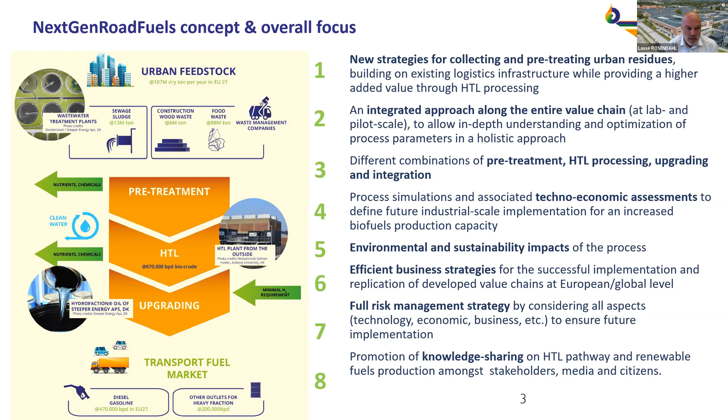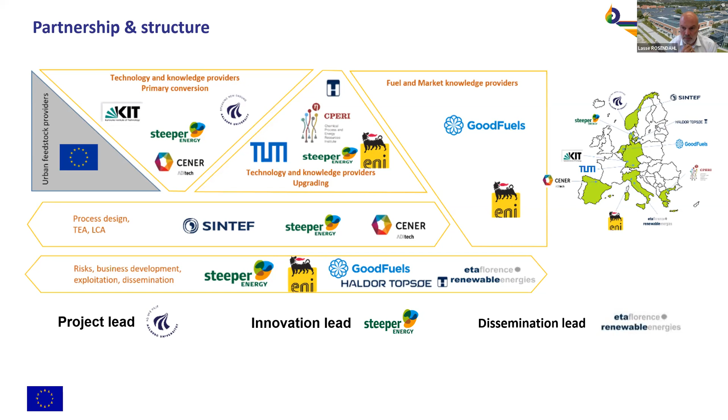But to get back to the sewage sludge, it is an abundant resource. It's one of those resources that just gets more and more abundant as more and more countries become adept at wastewater treatment. And as an organic resource, it's seemingly quite attractive, but there is one issue if you want to make fuels, and that is the nitrogen content. You don't wish to put the nitrogen all the way through to your final fuel.

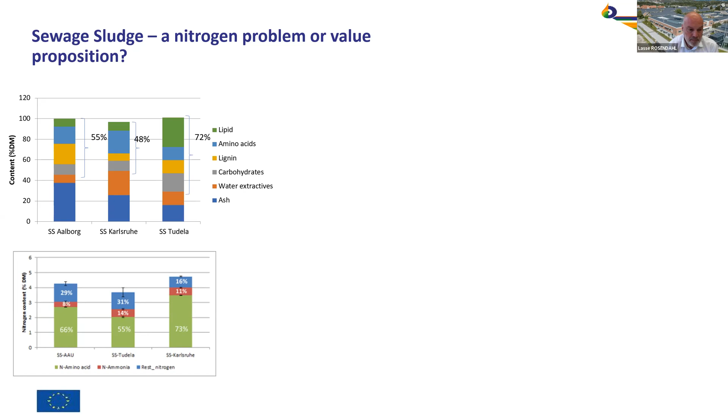And here you can see a breakdown of sewage sludge, one from Denmark, one from Germany, and one from Spain. And what is apparent is that there is obviously nitrogen in the sludge, and you can see also that most of that nitrogen is bound in the amino acids. And so that prompted us to look for an alternative value path for proteins. So we started looking at how we could extract proteins from the feedstock before we went into the traditional fuel process.

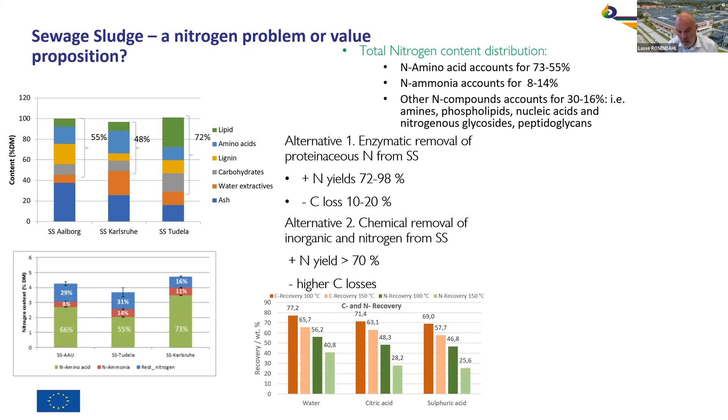And we looked at enzymatic removal, quite successful in terms of yields, but also, of course, costing us in terms of carbon that would not go to the fuel side. We also looked at chemical removal, so acid treatment, again, relatively good yields, but significant carbon losses associated with this process. So yes, you can do it. It doesn't come for free. So this is one of the conclusions.

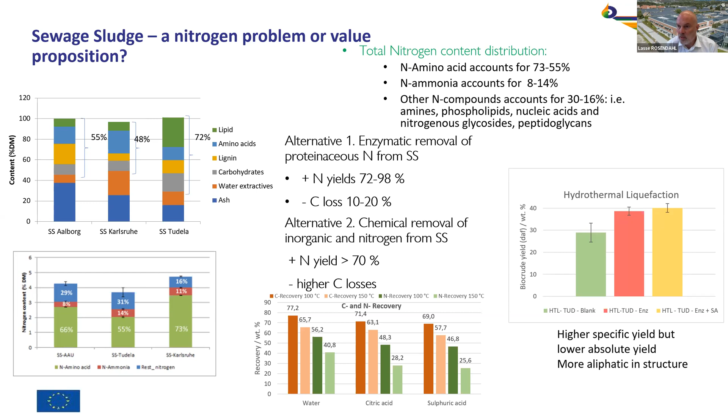One interesting factor on the subsequent HTL step was that if we did the two pre-treatment stages, we actually got a higher specific yield out of the feedstock. But because we also had the associated carbon loss, the total yield of biocrude from the feedstock we sent on was less than it would have been. So again, there's definitely a value trade-off on this.

One special feature of the NextGenRoadFuels project is that we've been spending a lot of effort on the upgrading, because the idea is not just to make a biocrude, an intermediate product. The idea is to make the full gasoline, diesel, marine fuel compound. So we've been looking intensively at the upgrading, so the refining of the biocrude.

And of course, one of the challenges in biocrudes is that we have oxygen present. So although we are working with hydrotreatment as you would in a regular refinery, we are hydrotreating to remove the oxygen. And then because of the feedstock, we still have nitrogen present. So we have to do both oxygen removal and nitrogen removal. And one of the challenges here is that these require quite different process parameters in order to remove that.

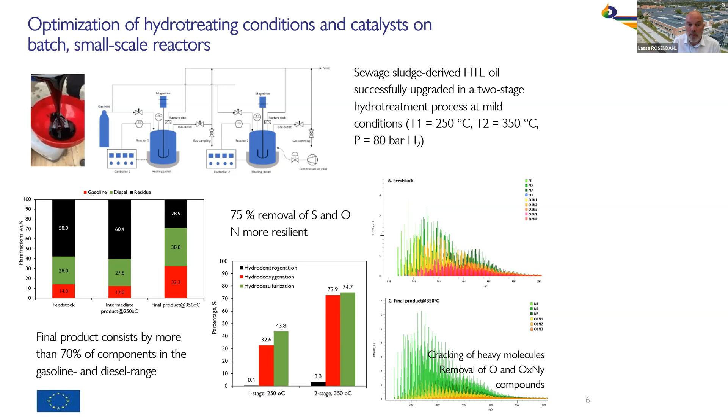So the focus has been, how do we combine a multi-stage upgrading approach in order to make sure that we actually do get rid of the heteroatoms that we need to get rid of in order to make the hydrocarbon products that we want. We've been working with many different platforms for the upgrading.

Also inorganics. We have a guard bed that removes the residual inorganics before we go to the actual hydrotreating. So you can say that as part of the project, we've successfully managed to cover the entire value chain that actually allows us to say that we have produced the final fuels.

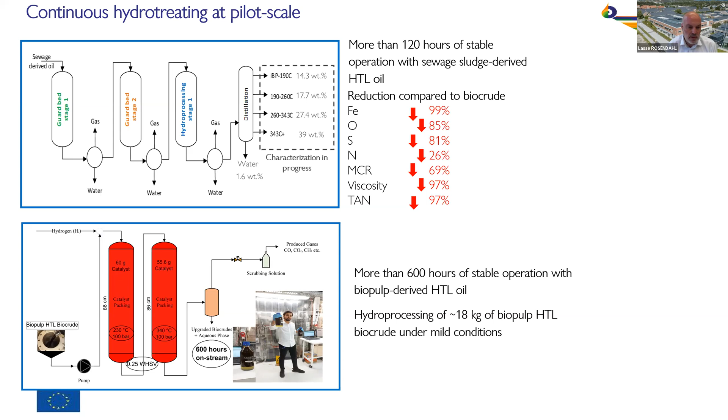And that brings us to the market side of things. Ultimately, the idea is, of course, to put these fuels into the market, because the market is still dominated by fossil fuels, hydrocarbons. Our fuels have to be compatible, both with the fuel infrastructure, and this is very, very important. It also has to be compatible with the existing end user technology, so vehicles, vessels, wherever you want to put the fuel.

And so this puts a number of constraints on what you put out there. So one is the compatibility. One is storage stability, whether we can actually store it for a period of time, and the last one is energy density. And if you're in the alternative fuel business, you may know that there are lots of fuels being discussed at the moment, not all of them with the same energy density that is in hydrocarbons.

And so our point here has been to make fuels that are sustainable. They are produced from renewable feedstocks. The process is sustainable. But they actually go in as synthetic versions of what we already know, so with the same energy densities, with the same viscosities, and so on.

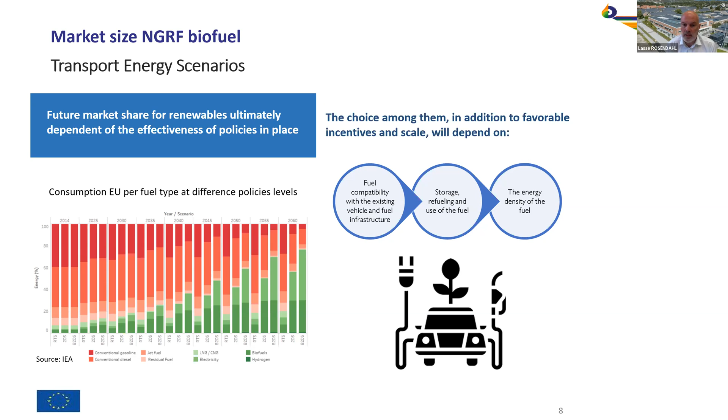You can also see in the European Union, of course, there are estimates of fuel consumption based on different policy approaches. And what we can see is that it is expected that biofuels penetrate significantly into the fuel mix, in terms of road transport fuels, but also in the others. Aviation is something we talk a lot about, but definitely also into the marine. And we have in the project been elaborating on these scenarios and basically what it takes to put HTL derived fuels into these markets.

So it has to be miscible. It has to be a fuel that doesn't jeopardize any of the limits. Sulfur is one of those limits that is extremely strict. These fuels have the advantage, of course, that they are not sulfur containing. Viscosity is, again, for atomization, etc. In engines, this is a crucial feature.

And so even though we have on the overall scale the same parameters, the composition of the fuels may be different from traditional, and so we have to make sure that also our viscosity is within specs in order not to jeopardize the end use side.

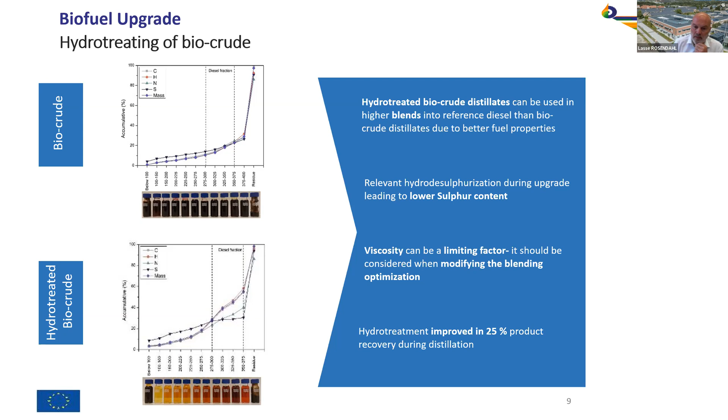In terms of market access, one part is at the very end of the process. So how do we position ourselves according to market, but also the input side. So how do we position ourselves in terms of being an attractive pathway for the different feedstocks?

And in order to explore this side of things, we in the project conducted quite a significant number of interviews with stakeholders in the Netherlands, in Germany, and in Sweden, in order to establish scenarios for implementation of this HTL process. And so we talked to wastewater treatment plants, we talked to policymakers, decision makers, influencers. We talked to the oil sector. We talked to end users, and we talked also to local authorities, municipalities, in order to establish the entire framework or set of boundary conditions that would allow us to implement a technology pathway such as this.

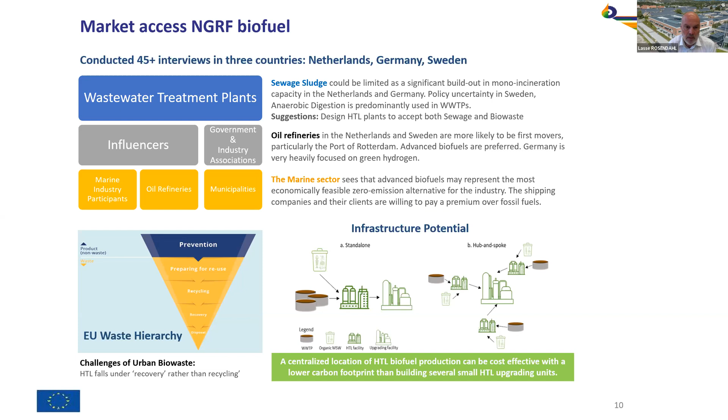So that brings me to the very final conclusions. Yes, nitrogen is a challenge when you look at the urban feedstocks. It is one that can be handled, but it is certainly something to consider. HTL is definitely effective for valorization of these low value input streams. We've managed in the project to shift from very much focus on the primary stage to actually look at the entire value chain and to have final products. There is a lot of legislation that is complicating the implementation of HTL, and this is also something that needs to be addressed. And finally, a technology such as HTL has the advantage that it actually covers the full range of transport modalities in the products that come out.